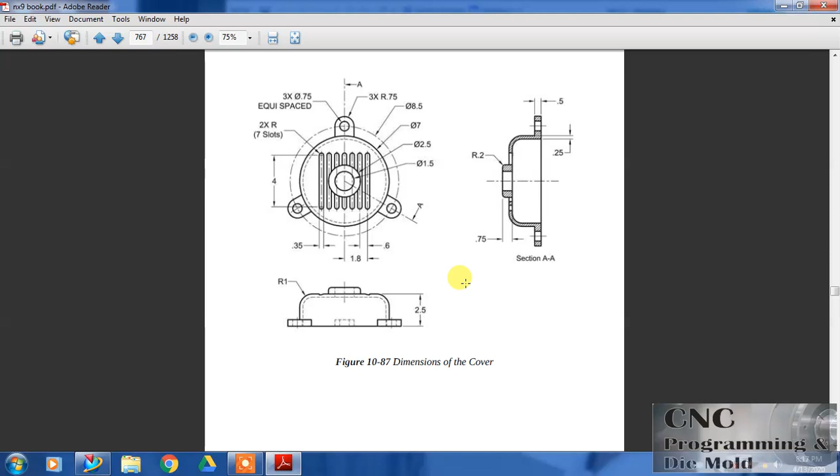And today in NX CAD we are going to design this cover plate of the blower assembly, and later on we will assemble all the components. The blower we have already created; you can see my previous video. For this cover we will start with the part design, and this time I will start with the top view

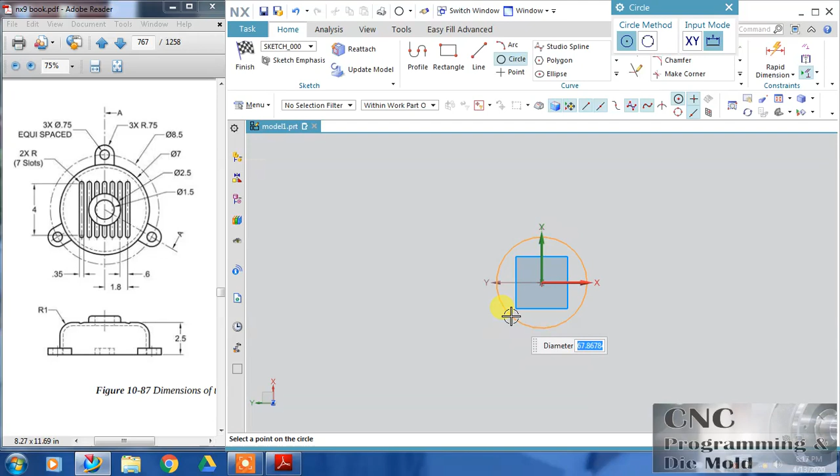and click OK. Now I will start with the circle. The center of the circle is here, and the diameter of the circle is 7. Click 7. Now maximize it. This is my first circle.

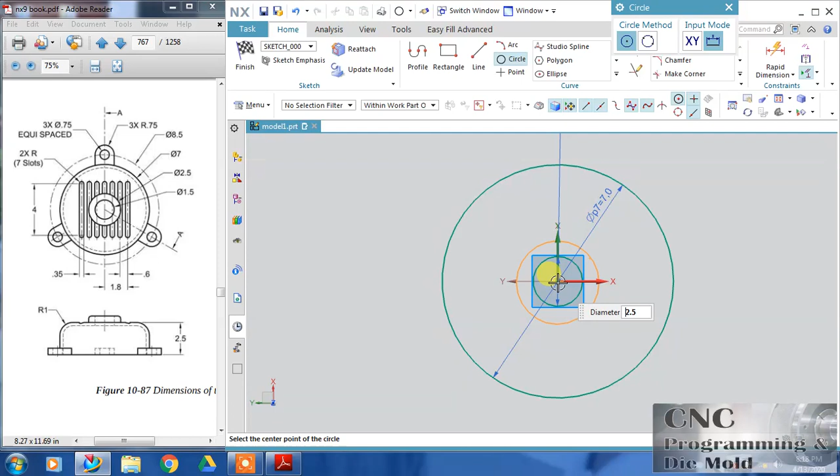Then, for this cut, there are two more circles here. So I will create these two circles, 1.5 diameter and the second 2.5 diameter, and click at the center. Now finish this. Now I will take extrude, and I'm going to extrude this as 2.5 in reverse direction, and click OK.

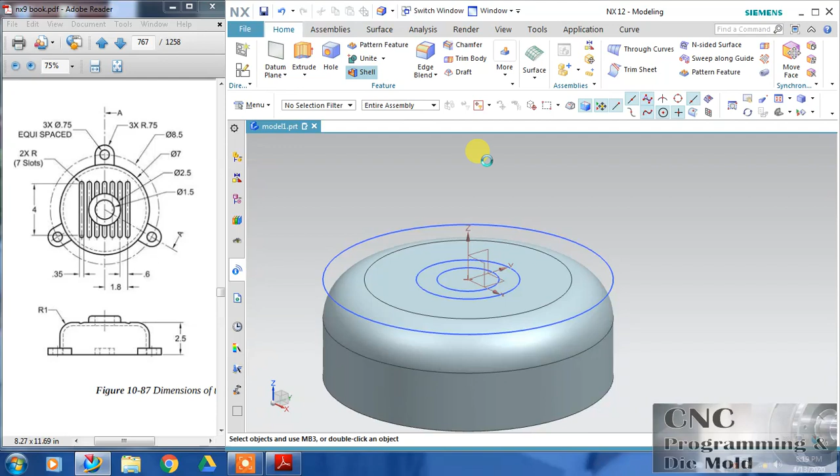Now I want to fillet this, and the radius is 1. Select this, 1 is the radius, so this will be like this. Now select the shell and remove this face, and the thickness is 0.25. 0.25 is the thickness of the wall. Now you see, this is the preview, and now some height is there.

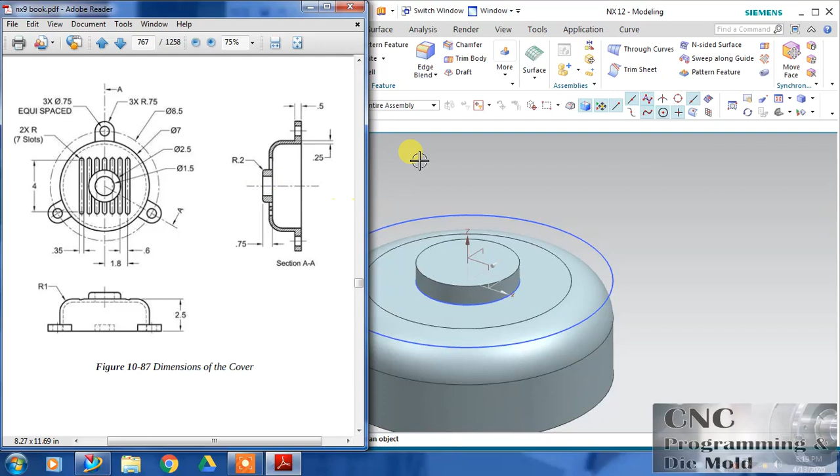This is 0.75 minus 0.25, means 0.5. This will extrude 0.5, so select extrude and select the bigger circle, and this side is 0.5, and unite and close. OK, and the radius of this top is 0.2. Select the upper edge, the radius is 0.2, and click OK.

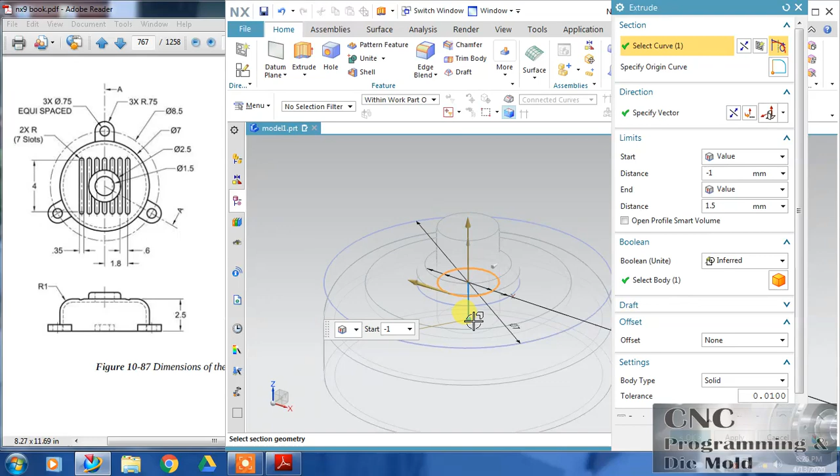Now again I want to extrude, and I want a cut between this, and select it as a subtraction, and click OK. Now you can see. Now hide this, or we can do one thing. First we have to design this, and later on we will extrude. Okay, no problem. We will change this by using the reorder method.

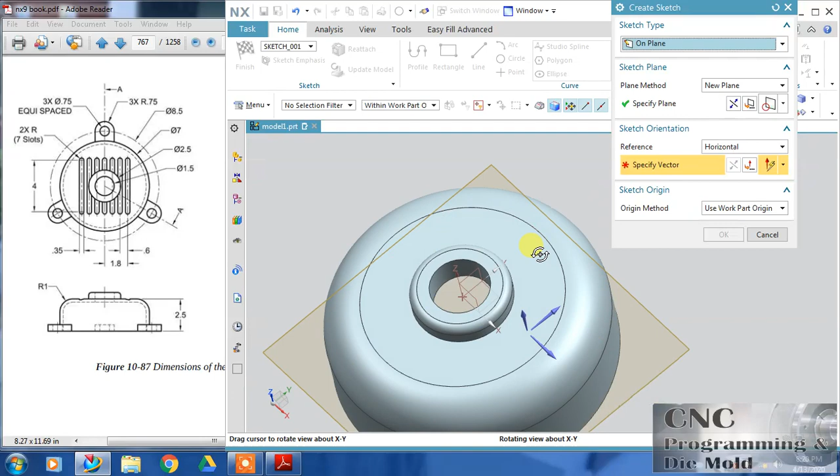So select this bottom and click, and project the circle. This is my projection, and for this select a rectangle, click, and orient them vertically. Now I'm going to trim this because I don't want this. Just click over this and change this line to vertical, and I need one circle here, and change this line as reference.

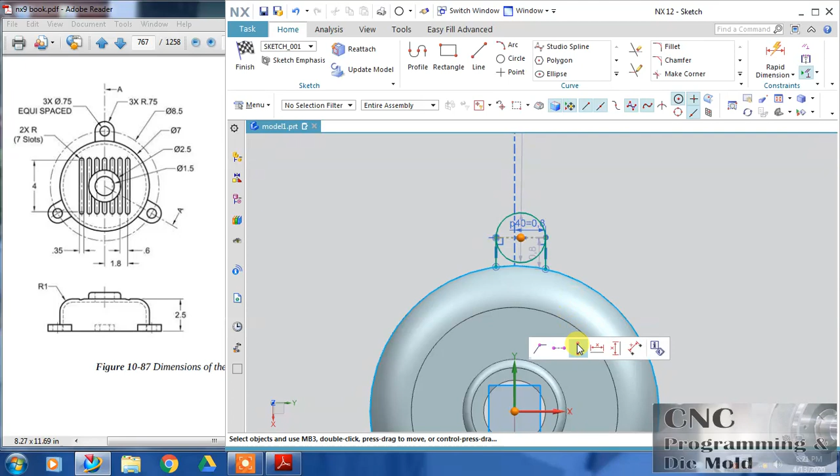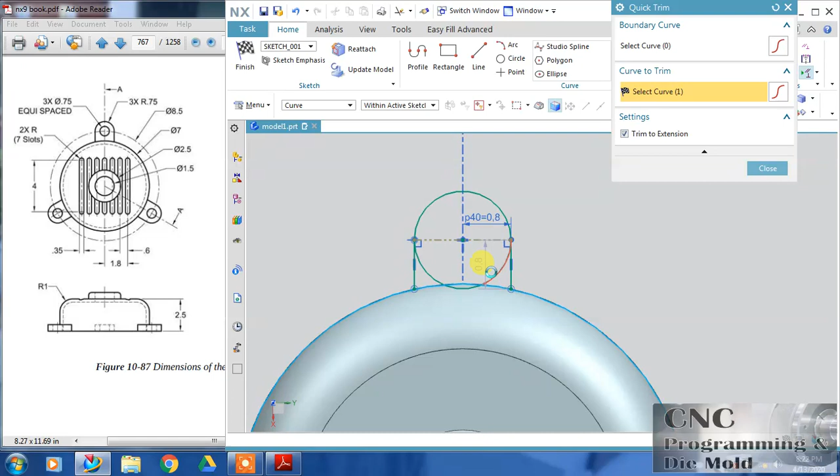Now dimension this. The radius of the circle is 0.75, and click OK. Now vertically align this. This is 0.75. Change this to 0.75. Click, and this gap and the inner circle, just delete this. And BCD is the base circle, 8.5 is the diameter, so dimension half of 8.5, divided by 2.

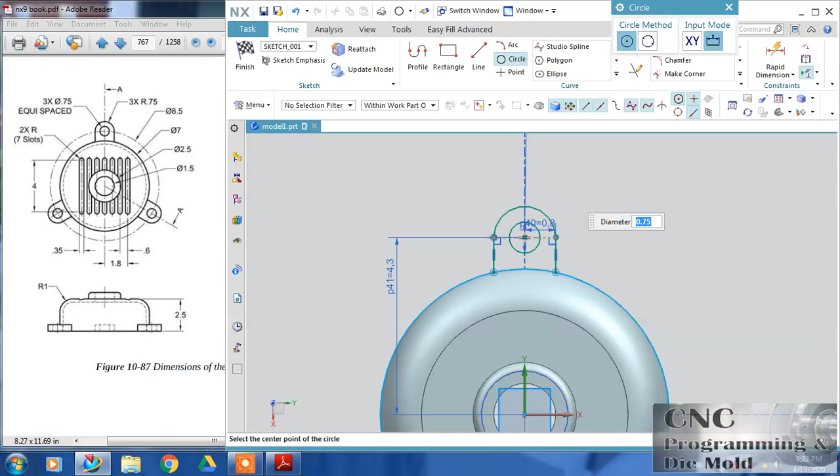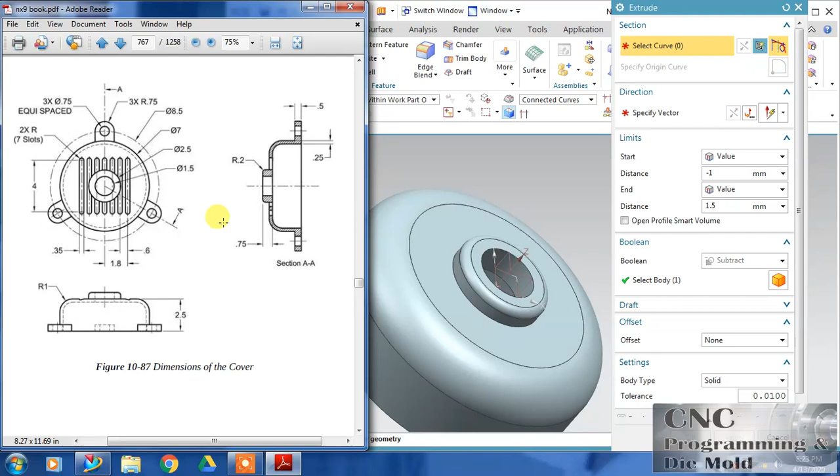And one more inner circle is there, an inside circle with diameter of 0.75. Just trim this, or we can do pattern at the same time, or just delete this and finish, and extrude this as 0.5. So select this and this, and 0 and 0.5, and unite and click OK.

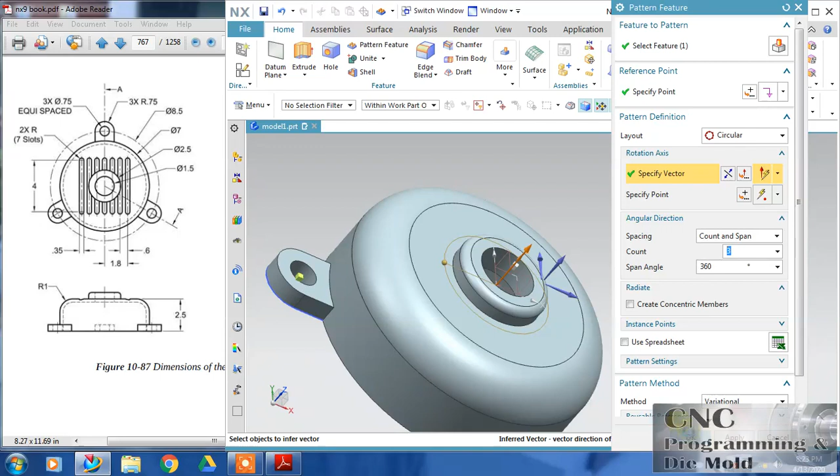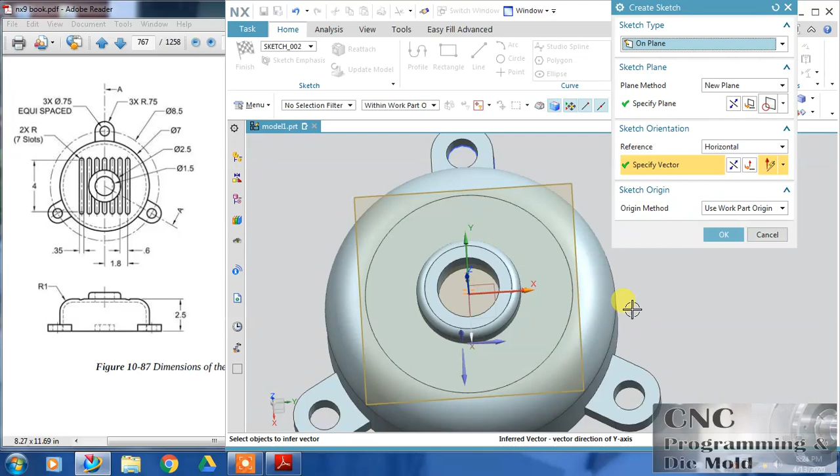Now select pattern feature, select this axis vector, this vertical, and 3. This is also complete. Again, for this cylindrical slot, click over the top, select this and click OK. Now I am going to draw a single cylindrical slot.

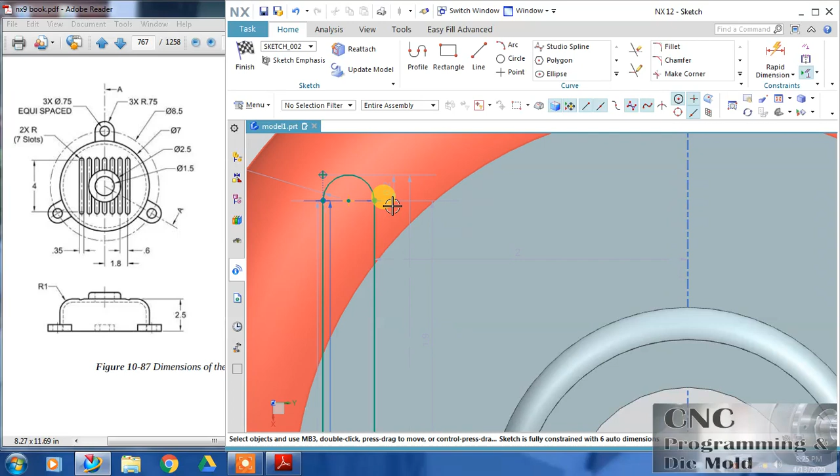Now fillet this, again, now dimension it, length is 4, and vertical. Define this line as vertical; it is already vertical, that's why it is not showing. And the diameter is, just zoom this, and the radius is 0.35 divided by 2

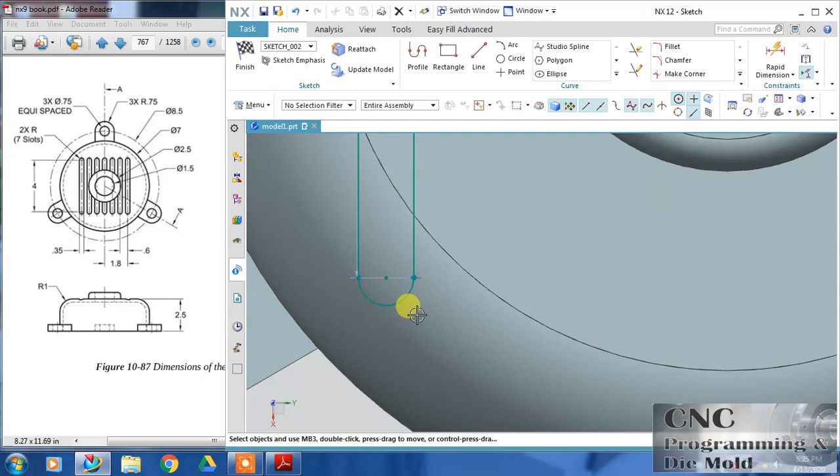and close. It doesn't matter because I don't need this, just delete. Okay, and the same way I don't need this, just delete, and here also just delete this, and this is 4, enter and close, and make it align with the horizontal, and the distance between this is 1.8.

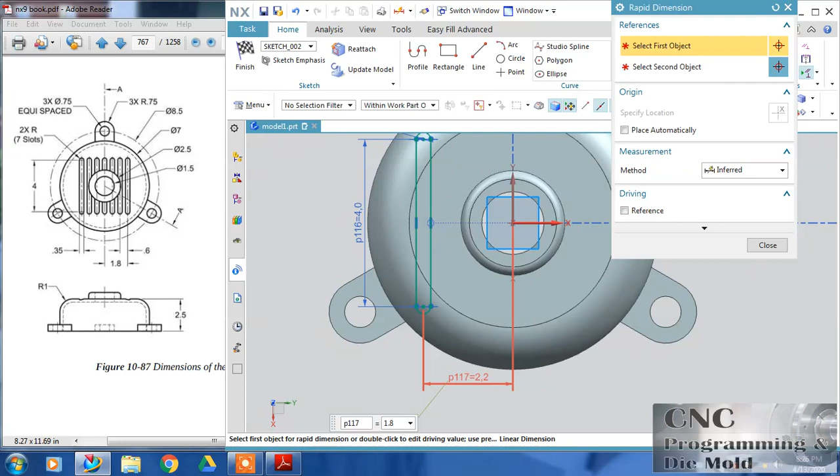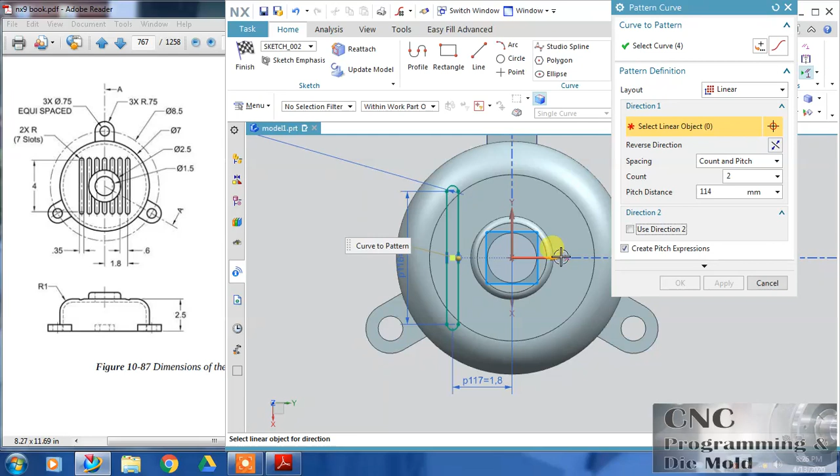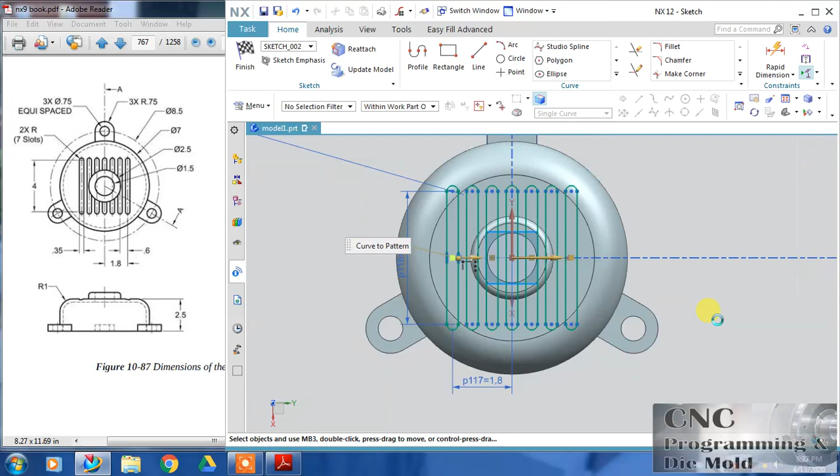Now close this. Now I want to pattern this, so go to pattern curve and linear pattern. Now select the curves and the linear direction as this, and the number count and the pitch. The pitch is 0.6. 0.6 is the pitch and 7 is the count, and click OK, and finish this.

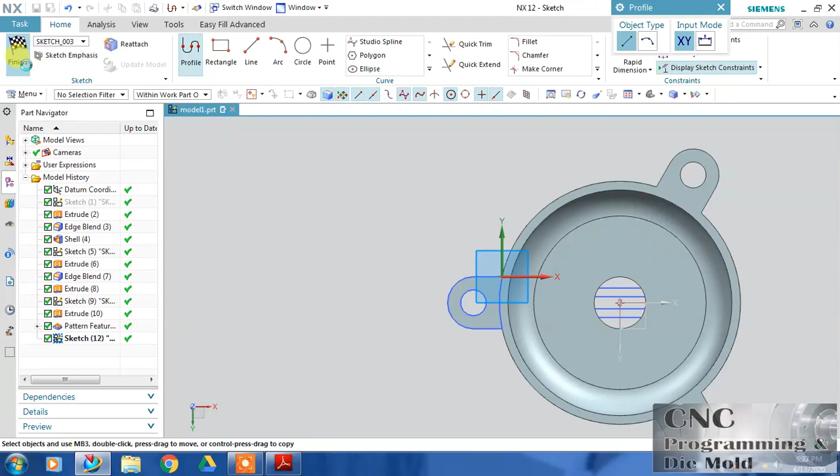I want to cut it, but before the cut I want to reorder this, before this extrude. Now just select extrude and click all these curves. Sorry. And subtract this and reverse the direction and click OK.

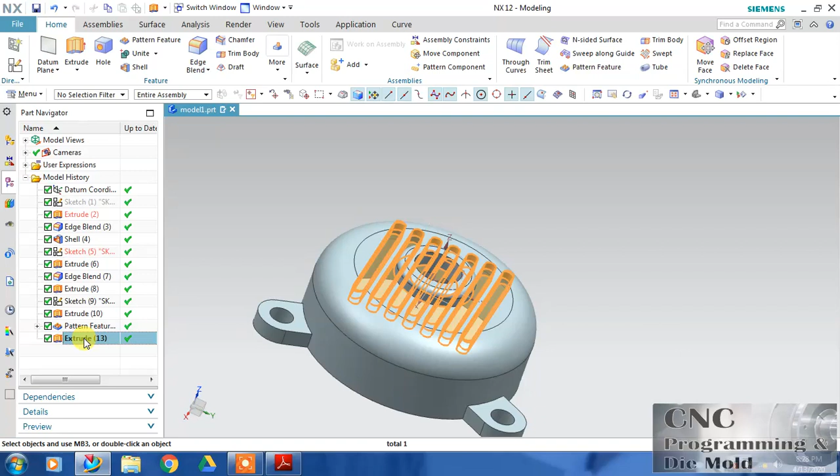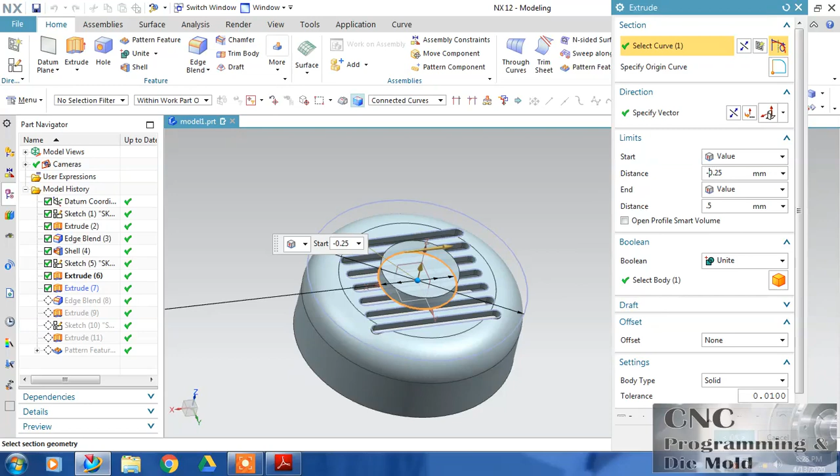So I hope you understand the method of reordering. Just select this and drag it below the sketch. Okay, now in this extrude double-click this, and I want this as 0.25 in the second direction, and click OK. So my result will be like this. Okay, so this is my second part in the blower assembly.

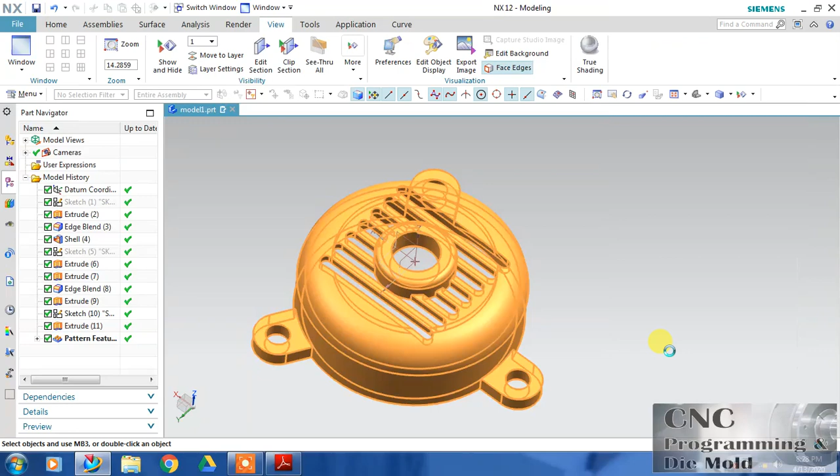And if you want to change the color, just go and change the color, and just select a random color now.